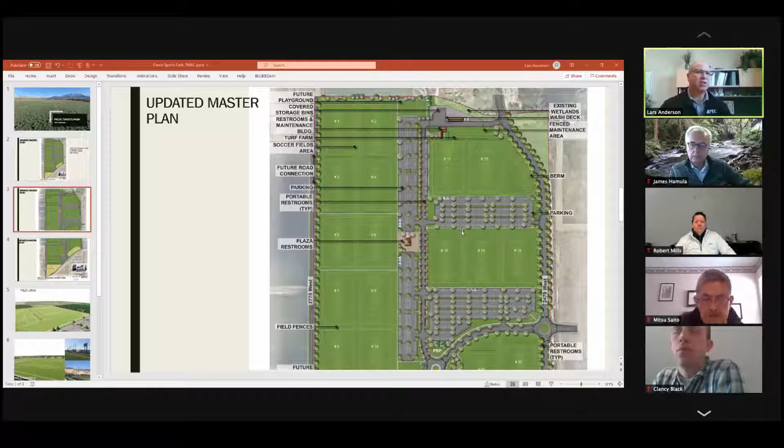This shows the southern portion, the additional 7 fields down in the south. Now these areas we call overflow parking, because we're not sure what to do with them. We don't need them for fields, they're too small for fields. They could be developed, could sell them off to private developers, or we're looking at maybe doing a pickleball complex. We're looking at other options for these small areas. Generally speaking, it's going to be a soccer complex for 90% of it.

Any questions about the design or the impacts of the design?

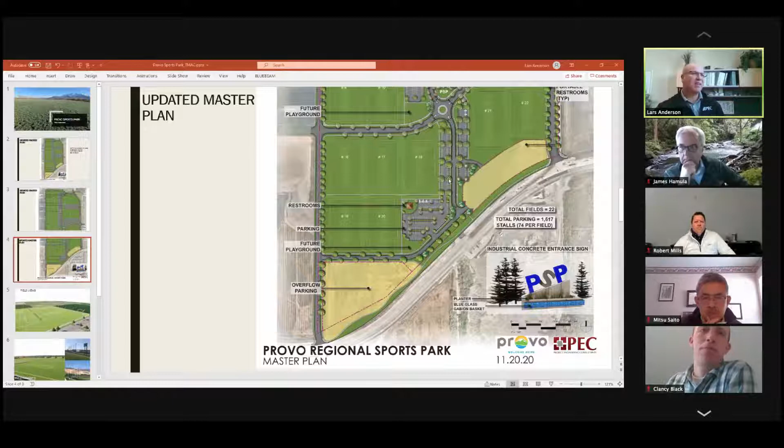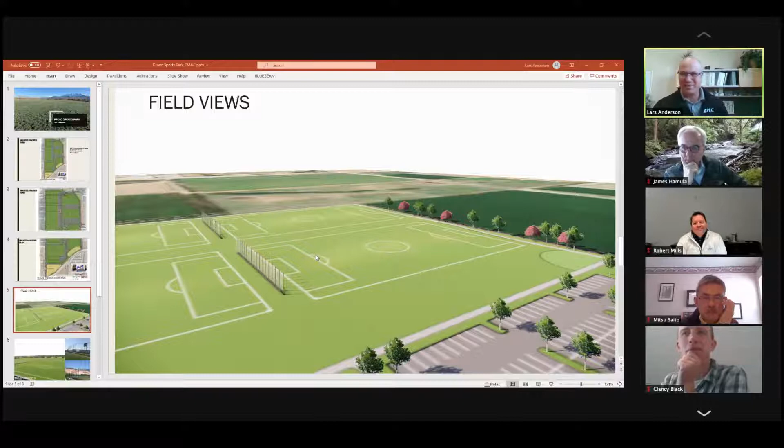Okay, I'll keep going. I wanted to show a couple of 3D views of the fields. We're using large nets between the fields to keep one field from bothering the other too much. That's really important with lacrosse too, because those lacrosse balls can go pretty fast and hard, and can do some damage if somebody was walking by behind the goal unsuspectingly. Bad enough when you're on the sidelines, and those kids are fast and good at what they do. So this shows what those nets look like and how tall they'll be.

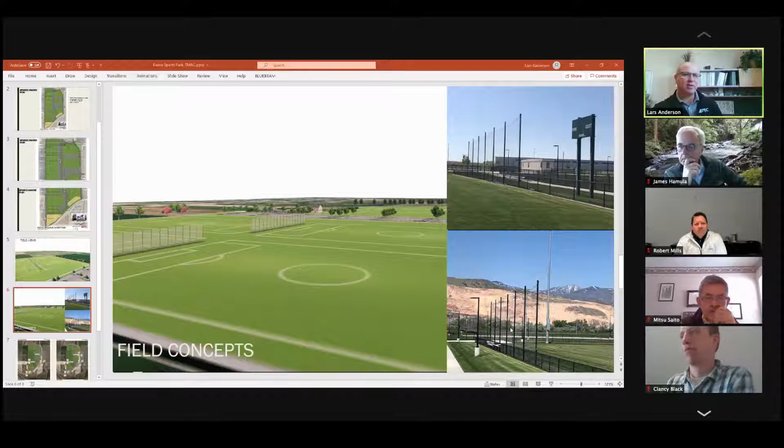We did a similar design at the Salt Lake City RAC, they call it, where there's soccer and lacrosse as well, and that's where these pictures are taken from. So I'm going to dive into the traffic, if you're okay with that.

Okay, so on this slide we have the 2025 view of what the traffic would look like. This is if all 22 fields at the time - you can see it's a different design, we rearranged the fields - but if the entire area was being utilized at the same time, these would be the turning movements, the counts in 2025. It does fail at the intersection without a signal - the intersection of 2470 West and Lakeview Parkway fails without a signal. With a signal, it operates at C or better.

You can see 396 right turns in the peak hour in 2025, jumping up to 476 in 2040. So a lot of traffic, it's going to be a fair amount. We've worked with the city in designing 2770 West also to be built in conjunction with 2470 West because of the traffic. Now there's a connector road that connects between the two roadways off of Lakeview Parkway to move some of that traffic off the parkway, so people just moving through the site can do that without having to go out to the arterial.

Lars, can I ask a quick question for clarification? Yes. What do you think the probability of the entire site being utilized at the same time is - like, how often would that happen? A couple times a year at the most.

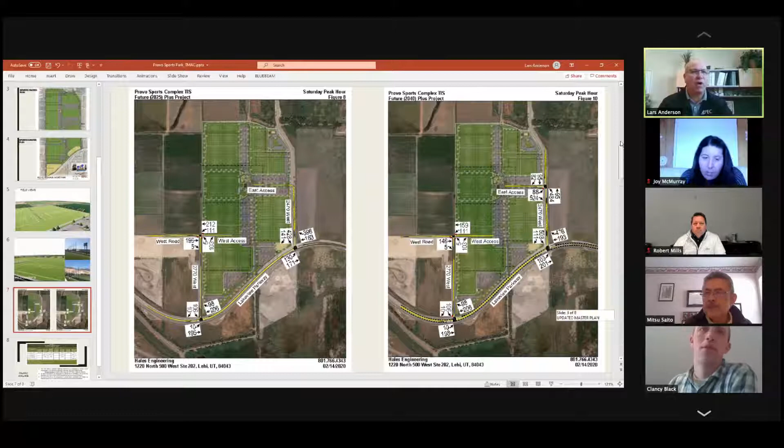So we've got this site plan. Is this like in final design, or what's the status of the overall project? I'll move up to show the overall so you can see this was just for the traffic. So let's see if that moves this. I think it did. Yeah. Okay, so it is at 90% design.

We're going to the CRC right now. On the fields and the parking lots, this area, the areas in yellow are not designed at all. So those areas, we're still working on some concepts there, but the rest of it is at 90%, and they're filling the site because it's going to take so long, and it's such a massive area. It will take them literally years to fill.

Okay, so I have a question related to what the general plan is and what's happening around this sports park. It is located not far from the airport. What's planned for the properties contiguous to the sports park, other than the BYU piece that has already been discussed?

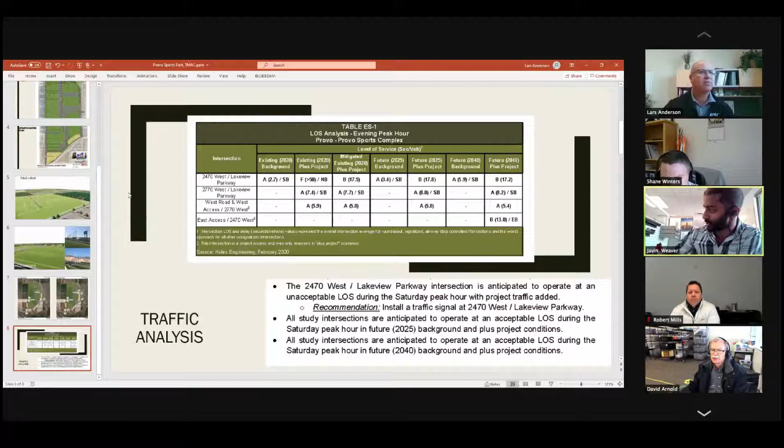To answer your question a bit more, on the future land use map it does show neighborhood mixed use abutting 2470 West. So there could be the potential of having more food establishments there on a regular basis than solely food trucks.

Is 1150 the only road that goes all the way through and hits this, other than 6 South? So it's just 1150 and 6 South, and Lakeview Parkway. Those are the two major collector or minor arterial streets, same cross section. 1150 South would go all the way.

So 1150 is where he has his cursor, right? Correct, and that fits with the plan. And where does 6 South hit, up above? So yeah, we will connect 2470 West all the way to the north, up to 6 South. Yes, it will connect there.

Are we ever going to straighten it to center, or will it always have that jog? Right now I don't have that, it's all based on funding. The plan would be to eventually get rid of the jog and get more of a straight shot. You've got the school there as well, so that's a consideration we'd need to address in the future. Right now it would just go to 6 South, and get that straightened in the future.

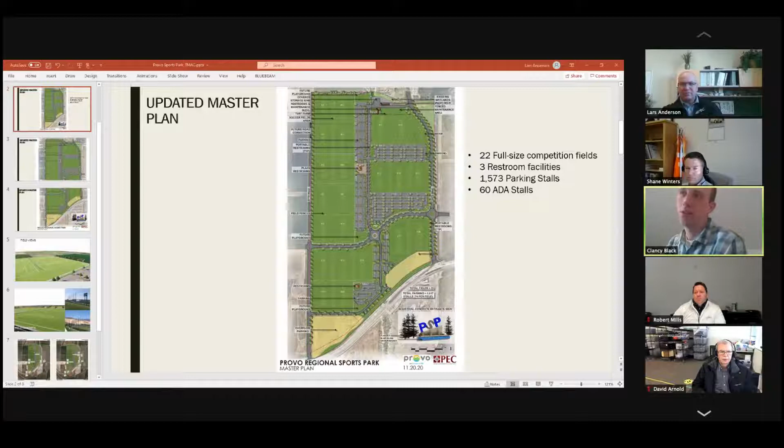So this question, like I said, it's merely curiosity. We are the transportation group, but I'm just curious from the city's perspective, what's the strategy for these? I mean, do these tournaments pay large reservation fees that's beneficial to the city, or is it a general economic driver that just brings people into the city? I don't know who could answer that, but I'm curious what the strategic approach is for things like this.

I think I can answer that. In the financial analysis, tournaments bring as much as $30 million a year into the city from this park. So it's a substantial amount. The direct payments they make to the city will pay for the maintenance of the facility. You don't get your initial investment back with the direct fees, but you get it back overall with the city because of the hotel fees, the restaurant fees, the airport fees, all those things. So the financial analysis was pretty substantial payback over time.

Well, very cool. Thanks, Lars. Yeah.

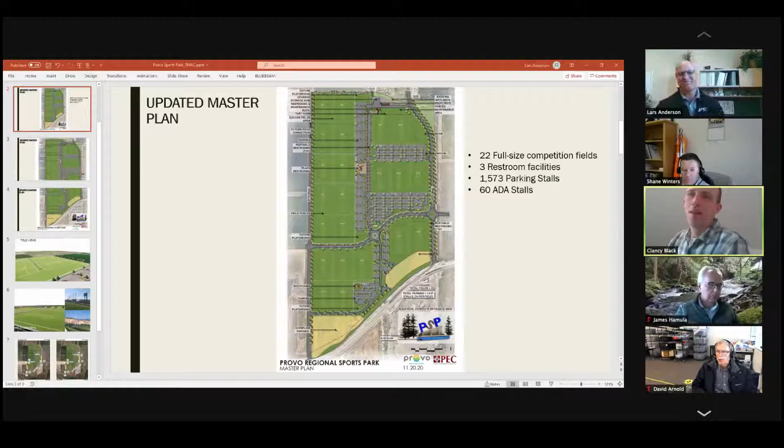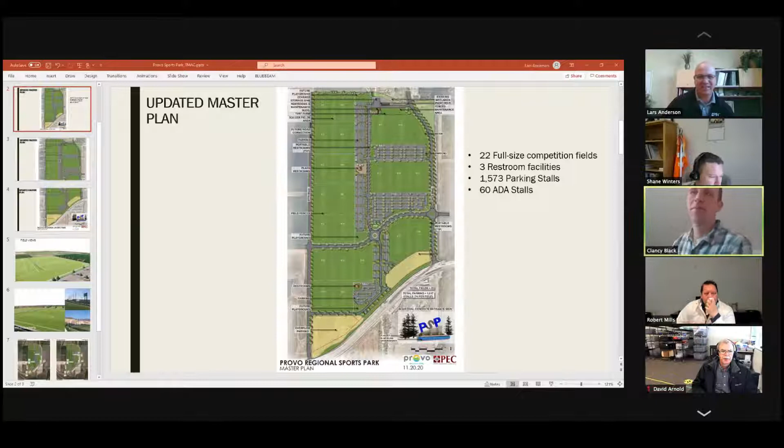And we will move on to item 2, which is our continuing discussion of the evaluation criteria for Center Street.

I have some thoughts and comments on the evaluation criteria that were sent last time, but Robert or Shane, where do we want to start with today's discussion? I think we should start with your comments.

Okay, absolutely. I do want to give you a heads up, we have had a kickoff meeting with UDOT. On the signal timing thing? Yep, they're going to be looking at multiple things, retiming that downtown area, 100 North, things that could help improve. Everything's kind of on the table to see what we could do to help towards that intent statement.

So just a heads up, that is moving forward. When we start to get information back from their work, we will come to the TMAC committee and present their findings, and some of the benefits and maybe some of the negatives.

Cool. I actually had an idea that I want to add to the project list, and that would be good to bring up in that discussion with UDOT, Shane. I'll share my realization, my eureka moment story.